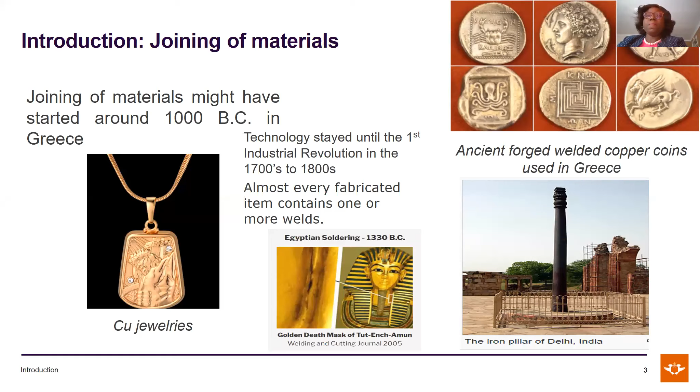In general, civilization and welding started with copper, then progressed to bronze, silver, gold, and iron across manufacturing industries. But over the years, with the advent of the second, third, fourth, and even the fifth industrial revolution currently in Japan, welding technology has now been used in joining metals, plastics, composites, and so many materials globally.

Hence, the importance of welding technology, and more so, the importance of researchers knowing fully how to characterize the welds to be able to ascertain the joint integrity.

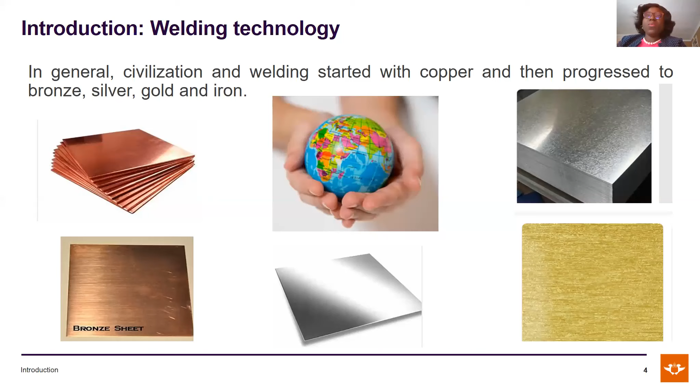With this background, still on background, classification of welding - I'm not sure how many of us participants are very familiar with this particular field. I've put this slide here, but I will try not to bore you.

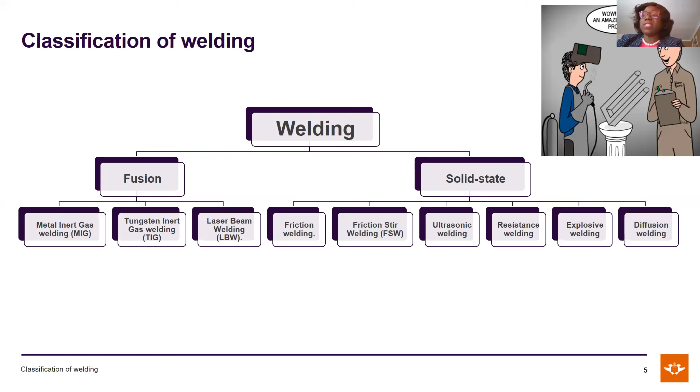The general classification of welding is into fusion welding technologies, which is the conventional welding technologies, and the solid state welding technologies. Under fusion welding, we have metal inert gas welding, MIG, TIG, and laser beam welding. Under solid state welding, we have friction stir welding. We also have other welding technologies like friction welding, ultrasonic welding, resistance welding, and so on and so forth.

Now, narrowing down to the friction stir welding technology that I have been able to work on and contribute to - I've been working in the field of friction stir welding since 2008, over the last 12, 13 years. This technology was invented by Dr. Wayne Thomas of the Welding Institute in the UK in 1991.

It is a solid state welding process, as I mentioned earlier on. It's a process wherein we plunge a tool into two abutting faces of two materials to be joined. The materials could be similar and they could be dissimilar. This technology has been used to join metals, plastics, and composites as well.

Over the years, the technology has had a lot of improvement. It is suitable for butt, lap, T-joint, and so many other joint configurations. And the welding temperature is usually between 60 to 80% of the melting temperature of the base materials.

I recall when I've performed welds using the friction stir welding technology, I've had opportunity wherein I inserted thermocouples in the welding interface, and temperatures recorded were between 60 and 70% of the melting temperature. Sometimes as well, we've done some welds wherein we're able to use a thermal camera. That also confirms that the welding temperature is below 80% of the melting temperature of the base materials being joined.

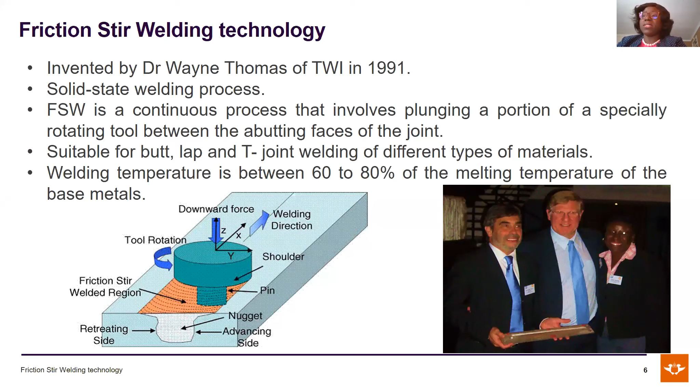So furthermore, the technology has proven to be highly beneficial to the industry in the sense that the evolving properties of the welds are far better when compared to the conventional welding technologies.

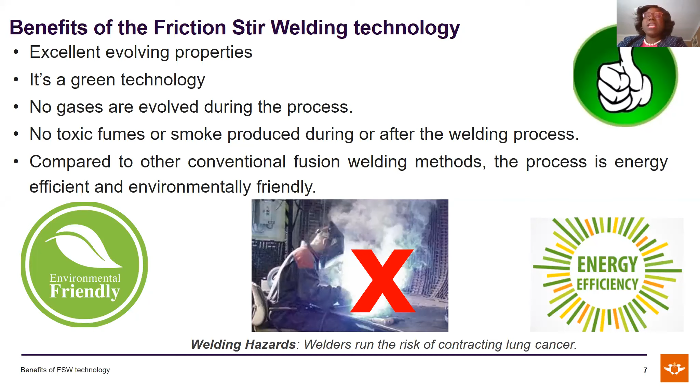We use eye goggles in case of debris that could fly off during the welding process. So no toxic fumes or smoke is produced during the welding process, and hence, when compared to other conventional welding technologies, it can be said that the friction stir welding process is highly efficient and environmentally friendly as well.

Furthermore, still on benefits, from the literature and also from what I have experienced working with this particular technology, it comes with enormous benefits regarding metallurgical benefits, environmental benefits, and energy benefits as well. So it has low distortion, good dimensional stability, absence of solidification cracking as is very common with conventional welding technologies.

And for environmental benefit as well - huge as well. There's no need for shielding gas, no smoke, it eliminates grinding waste and all of that. And it's also beneficial in that it has energy benefit as well.

In that it allows improved material use, and it has been proven in the aerospace industry that this technology has led to decreased fuel consumption in lightweight aircraft, wherein rivets have been replaced with friction stir welding, and that led to reducing the weight of the aircraft. And with the reduction in the weight of the aircraft, that led to a decrease in the fuel consumption.

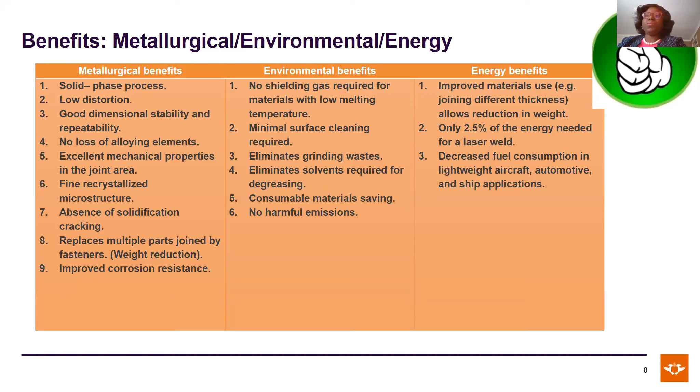The first friction stir welding commercial application was conducted in 2004, tagged as the Eclipse 500 business jet. This was a USA research and development program, the first commercial application, costing the US government $300 million, done in collaboration with the Welding Institute in the UK. I've been privileged to work on collaborative projects with the Welding Institute in Cambridge - these are some meetings, workshops, and trainings I've done there.

This particular project was in collaboration with the University of Leicester, which concluded on March 31st, 2020 - working across industry, academics, and a higher educational institution.

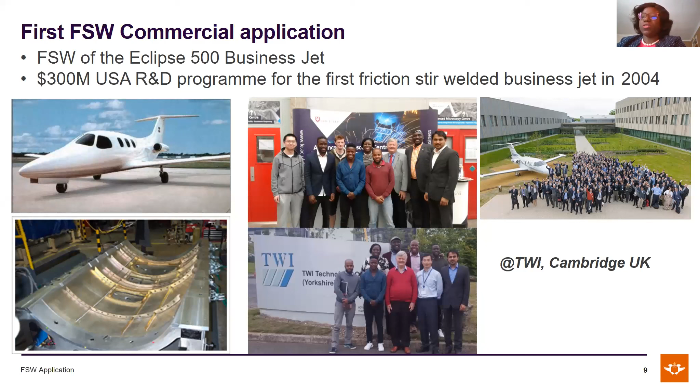Further commercialization of the technology today is seen in Shinkansen trains in Japan. I was on the Shinkansen train in 2019, and I was looking out for typical applications of friction stir welding technology. My understanding is this technology has been used over many years in Japan to weld the floor panels of the Shinkansen train, a high-speed train going about 320 kilometers per hour. This technology has been deployed because of its enormous benefits and advantages: stable, low distortion, and more.

It's been used in the aerospace industry. As I mentioned earlier, so many aerospace parts like wings, which used rivets, have been replaced with friction stir welds. Also, aircraft seat brackets - friction stir welding technology has been employed by Boeing to weld seat brackets on planes. There are other patented components where this technology has been used on aircraft, as well as on the floor panels of the underground tubes in London.

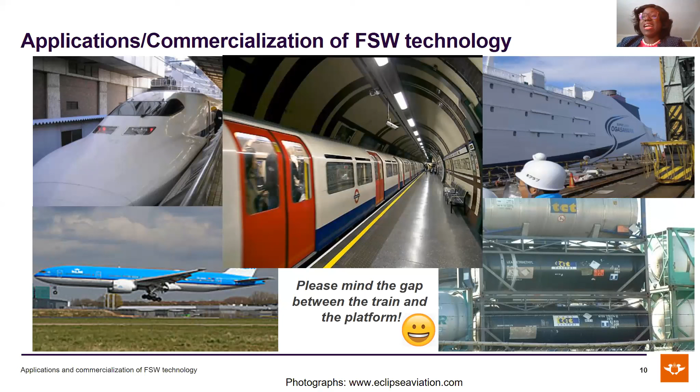I want to share a glimpse into how far we are in South Africa and on the African continent. Without doubt, South Africa is at the forefront of championing friction stir welding technology on the continent, and I think most platforms at the moment are still only in South Africa. I'm aware of some other countries also trying to develop interest in the technology. In South Africa, some industries are beginning to have interest in the use of friction stir welding technology, and one of them is Eskom, which has sponsored a project I've worked on.

We have Transnet - I've also worked with Transnet in the rail industry. Eskom is the power producing company of South Africa. There's also a tank container industry in Cape Town called GRW, which has been using friction stir welding technology over many years.

Even though the technology is well advanced in Europe, I know India is also at the forefront of championing so many applications in the field of friction stir welding. For us in Africa, we're getting there - it's gaining traction with a lot of research and development projects, though very few commercializations have taken place on the African continent.

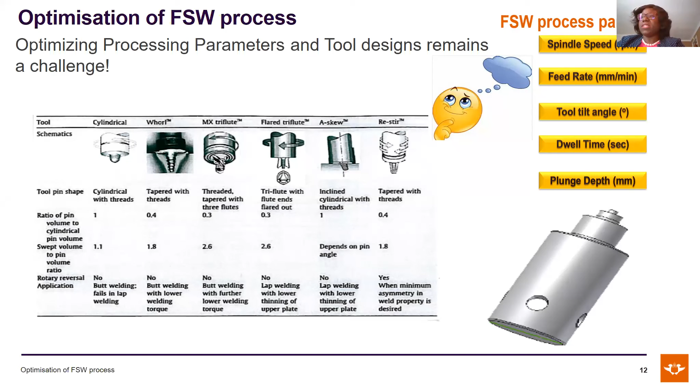Other aspects that need to be done to improve the joint integrity of friction stir welds is optimizing the shoulder plunge during the welding process.

This is because this tool shoulder helps with the consolidation of the welds. It helps with enhancing the material flow during the welding process. Hence, this also has to be optimized.

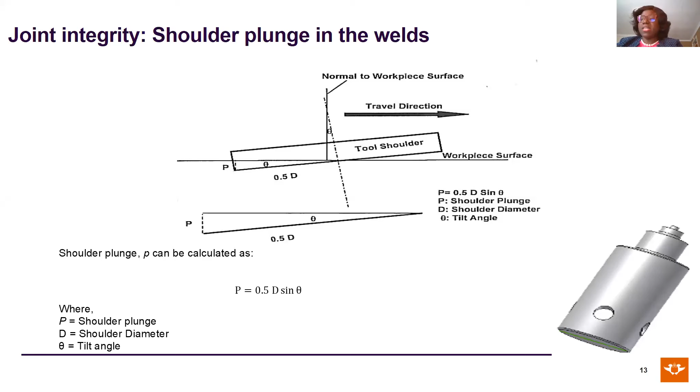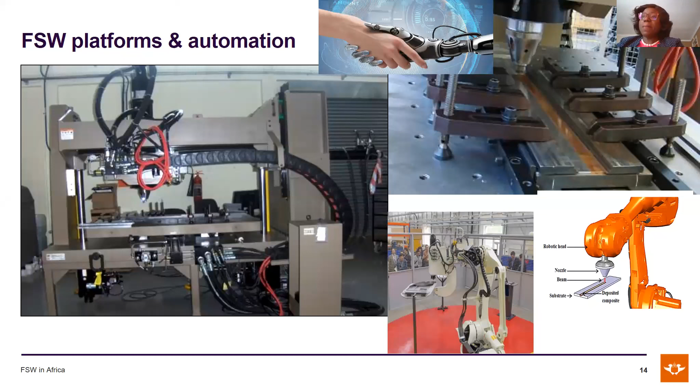This list is inexhaustive. I say inexhaustive because the welds that we're producing have typical applications, so the materials characterizations that a researcher wants to do at any point in time will always speak to the typical application of that particular weld. But then there are general guidelines, and I would say general basic materials characterizations that should be conducted when we are producing welds.

Like the first three are very basic: microstructural evaluation, tensile testing, and hardness testing. These three are very basic, and they are our first points of call that we always need to consider when we produce our weld, to be able to see and know what is happening in the weld in order to ascertain joint integrity. And then the checklist.

A checklist needs to be built by the researcher. If a particular weld will be used in applications wherein fatigue will come to bear, fatigue testing needs to be conducted. The researcher also needs to determine when bend tests are required, when corrosion tests are required with respect to welds that will be exposed to various atmospheric temperatures, environmental conditions, and all of that.

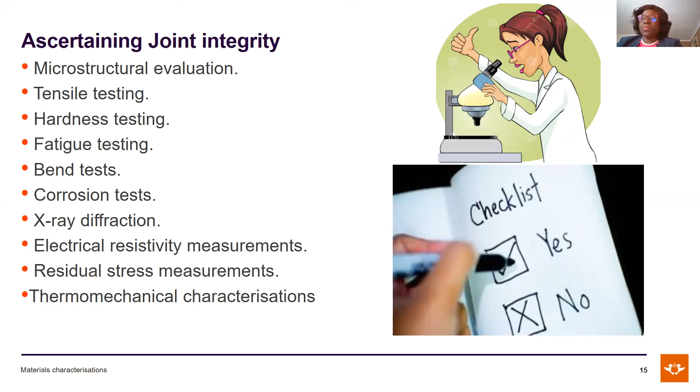So I will now go ahead to shed a few light on a case study of friction stir welding of aluminum and copper that I have been involved in. Aluminum and copper find application in bus bars in the electrical industry, and this project was sponsored over many years by Eskom, which is the power generating company in South Africa.

The fact still remains that up to today, these two materials, even though they come with huge benefits, cannot be joined with conventional arc welding techniques. Hence, the application of solid state welding technology like friction stir welding has been considered to join the two materials, either in butt joint or in lap joint. So in this particular field, a lot of research has been conducted by myself and some of my research team members.

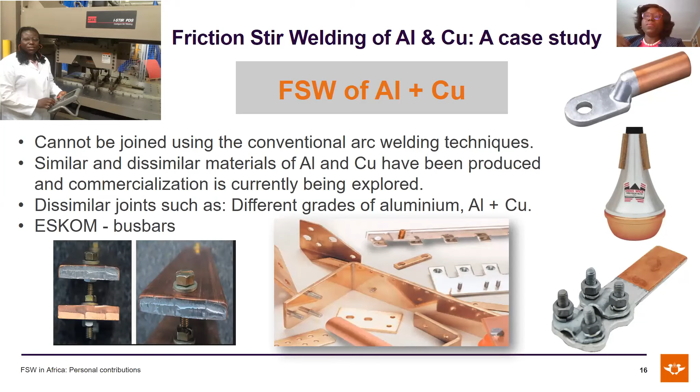I would like to mention some rudiments to joining dissimilar materials using friction stir welding technology. The position of the tool during the welding process is very, very key and important. At the beginning of dissimilar joining research, researchers were not aware of where to actually place the material, and also the direction of the tool.

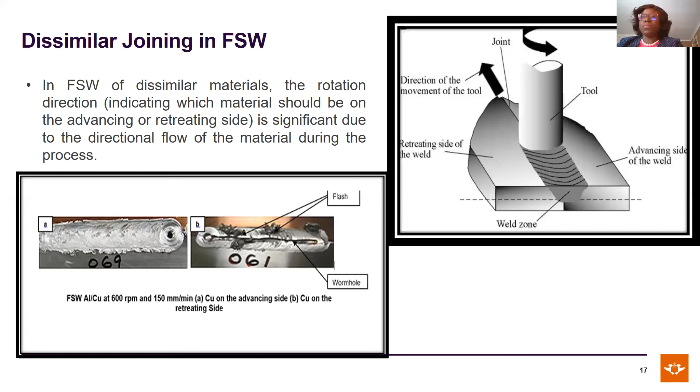It is also expected that, for a start, before a researcher even goes into conducting the welds, the researcher should first characterize the parent materials, because you need something to benchmark. You need the parent materials for benchmarking, so when we produce the welds, we have something to benchmark against. We characterize the parent materials individually.

It is also expected that we first join the parent materials as similar materials. For example, when I want to join aluminum to copper, it is expected of me as a researcher to start by joining aluminum to aluminum of that particular grade, and also join copper to copper, before progressing to come up with my weld matrices.

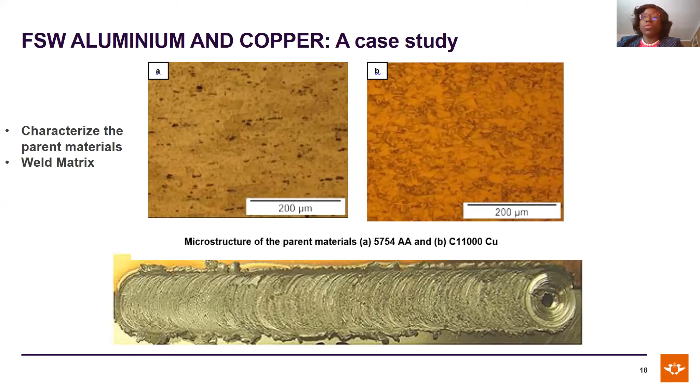Weld matrices are usually determined after consulting the literature to see what people have done in that particular field of study. It's always advisable to do this, and then you can use that as a basis to form your own weld matrices to carry on your experiments.

It's also important in characterizing welds that we consider the interrelationship between the input and output friction stir welding processing parameters. I mentioned earlier the input processing parameters: the tool rotational speed, the feed rate, the tool plunge, the tool tilt angle, the dwell time, and a couple more. There are 5 or 6 basic input processing parameters that we need to enter into the welding computer system for welds to be performed.

After the welds have been performed, a number of friction stir welding machines are able to give output data, wherein we are able to analyze the forces acting during the weld. We are able to correlate the joint integrity with the forces acting during the weld, and we also get data like torque and forces for most friction stir welding machines. We have the forces acting in three directions: the X, Y, and Z forces.

We have the spindle torque data, and we are also able to calculate the heat input into the weld. The heat input into the weld is very important, as it has been correlated to dictate the quality of the welds.

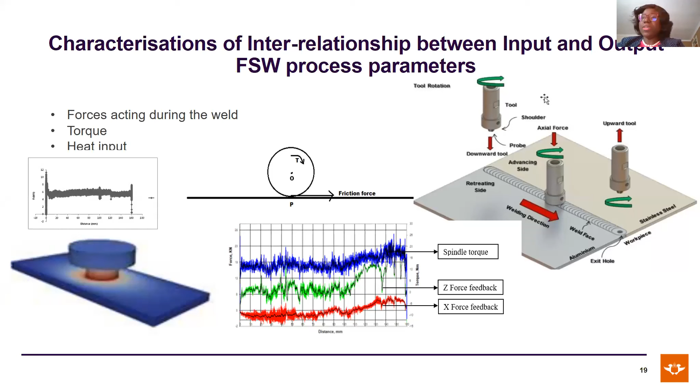After having looked at the interrelationship between the input and output processing parameters, it is also expedient to have the macro appearance of the weld. We section the weld usually at a point where it is stable to be able to have an idea of the welds.

At this point in time, my team and I have also used NDT techniques to ascertain the joint integrity of friction stir welds. I recall that one or two papers have been published wherein we highlighted non-destructive techniques and how we deployed them to ascertain the integrities of friction stir welds.

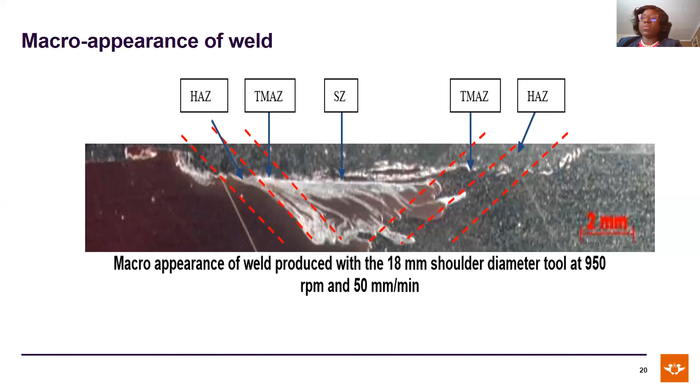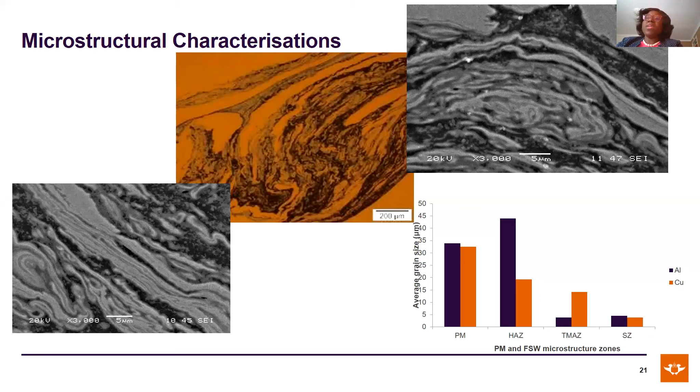Under microstructural characterizations, we also consider the grain sizes. We measure grain sizes because it's expected that the stir zone will always have very refined grain sizes if our processing parameters have been very appropriate. We measure grain sizes across various zones and characterize them, which can be directly correlated to the microstructures of various zones of the welds.

We also consider tensile testing. This is a basic one, wherein as a researcher we consider the yield strength, the UTS, the Young's modulus, and so many other data that we can get from tensile testing.

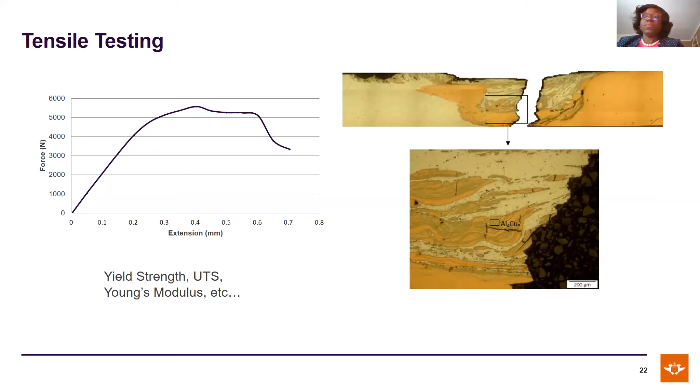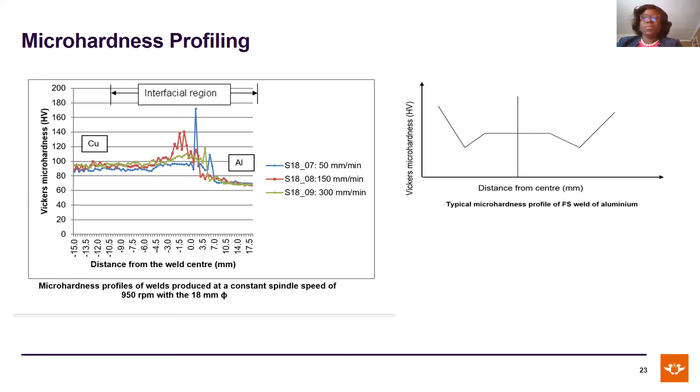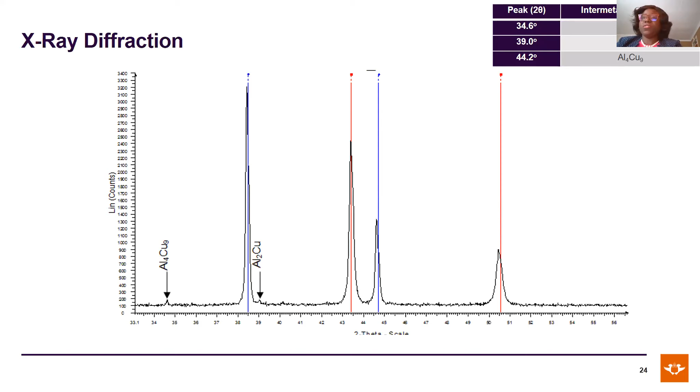And for further testing, because we are looking at aluminum and copper in electrical and electronics industry applications, we had to conduct electrical resistivity measurements to be sure that the welds produced are fit for use.

Because the heat input is correlated to the formation of the intermetallic compounds, in the sense that intermetallic compounds are formed at high temperatures, the electrical resistivity was correlated to the heat input to be able to have an idea of what is going on in the welds.

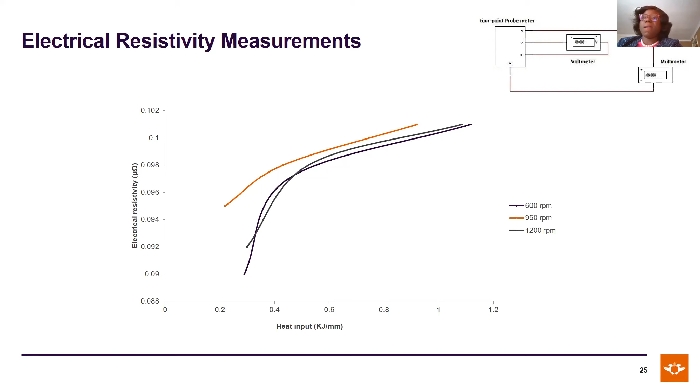So the next one or two slides will highlight some work we have done in the field of friction stir processing. This is a variant of the friction stir welding technology, also a solid state processing technique used to fabricate surface composites as in surface engineering, trying to modify the surface morphology of materials that have some limitations. The technology has also been used widely to produce metal matrix composites, regarded as advanced engineering materials, finding applications in the aerospace and automotive industries.

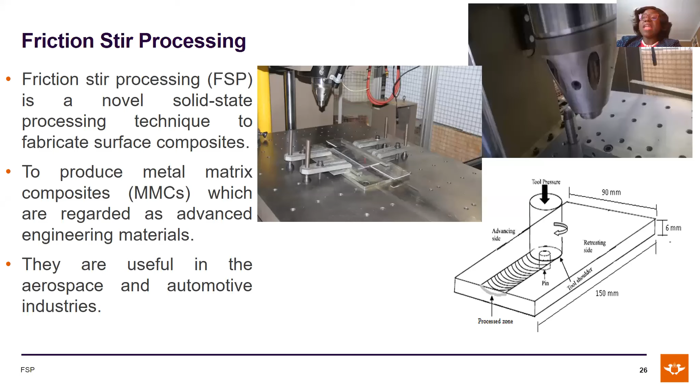The way we produce our FSP is we manufacture grooves in the substrate, the parent material to be used. We have grooves in them, and then we pour powder materials that we want to use to reinforce the surface morphology in the groove. In this particular study, one of my students did this study, which I supervised. We used titanium carbide powder, particle size between 45 and 90 microns.

We poured into the groove, and then first of all used a tool without a pin to consolidate the particles into the groove - that is stage number 2. We use the tool on the right-hand corner of my slide, designated as tool A, without a tool pin. We first run that tool with only the shoulder on top of the substrate, the parent material we want to work on.

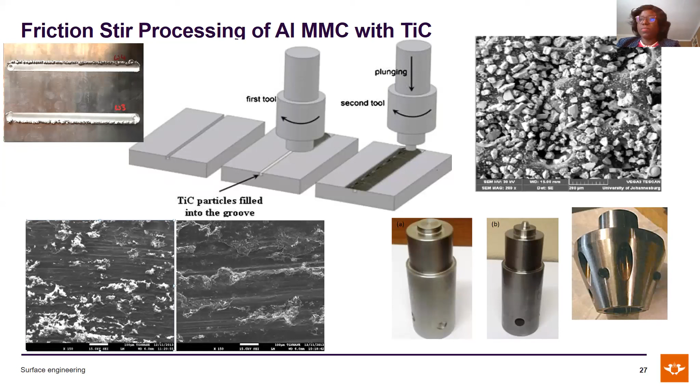In another study, also producing aluminum metal matrix composite, this time with a titanium alloy, we followed the same process, using titanium alloy grade 5 to enhance the strength-to-weight property of the aluminum material, and this greatly improved the strength of the material produced. You will see the microstructure showing an even distribution of particles and a very refined grain structure of the aluminum and titanium particles at the stir zone of the friction stir processed aluminum metal matrix composite.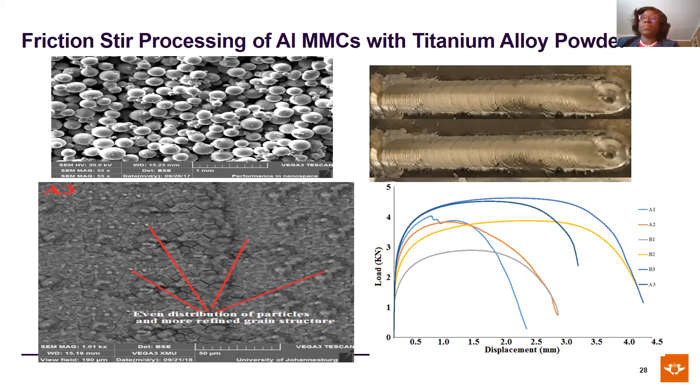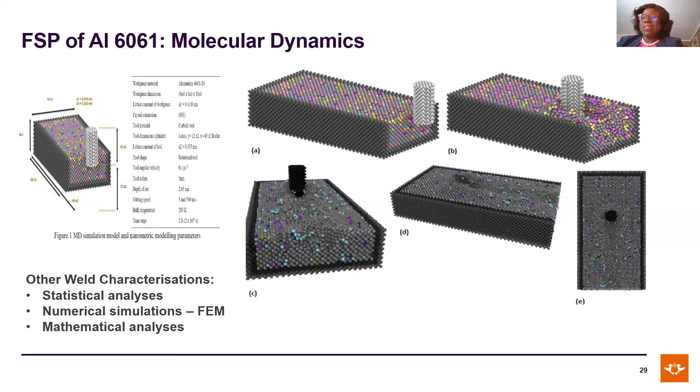Having said that, I'm coming towards the end of my talk. To summarize, I have shared with you this afternoon the background and fundamentals of welding generally. In particular, I shared my experience in friction stir welding technology, its benefits, applications at the commercial level and at research and development level. I've also shared how, as researchers, we need to ensure we ascertain weld joint integrities, and general materials characterization techniques we should consider in carrying out weld characterizations.

I've shared a typical case study of friction stir welding of aluminum and copper, and shared friction stir processing as a technology, how we have used it in surface engineering to produce aluminum metal matrix composites. With this background, I believe you will all agree that welding is a technology that will be with us till the end of the age.

This particular technology will be with us for quite a long time, because we always need to join two materials together - very, very important. Hence, the field of research in welding generally continues to grow every day.